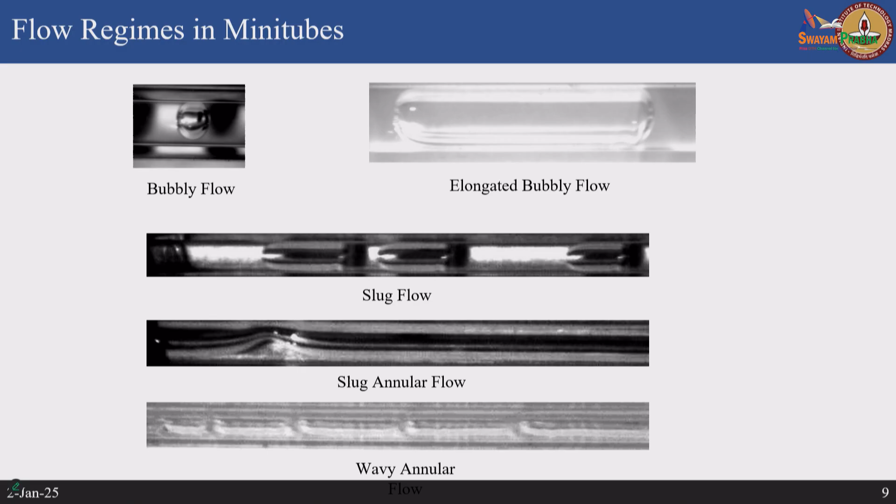Portion in flow boiling, basically the flow regimes in different size tubes, and then how we use correlations which are purely empirical, based on experiments, because there is absolutely no rigorous theory to calculate the heat transfer coefficient during flow boiling. Even in pool boiling we rely on empirical correlations.

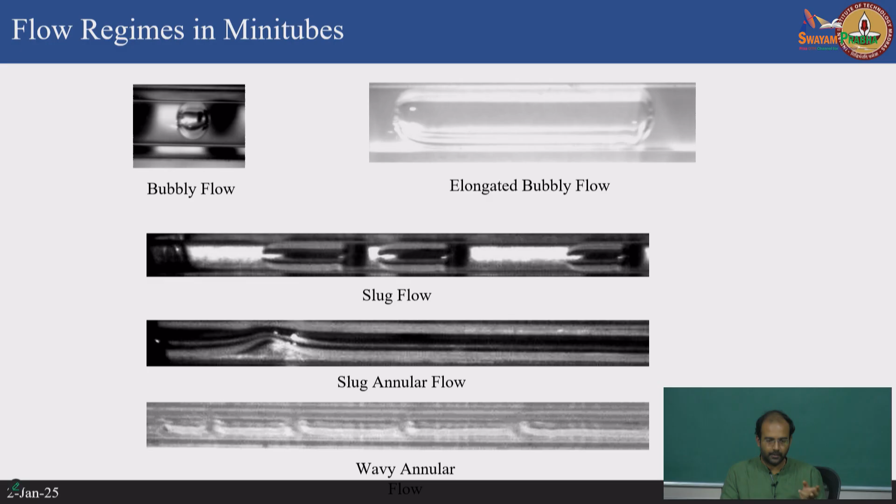So let's look at what I talked about when comparing the size of the tubes. As you reduce the size of the tubes, the flow regimes are quite different. In smaller tubes, the number of flow regimes is much lesser, so in that sense it is more predictable what flow regime you are operating in. At the same time, you may get the added benefit of improving heat transfer rates by doing flow boiling in these small size channels.

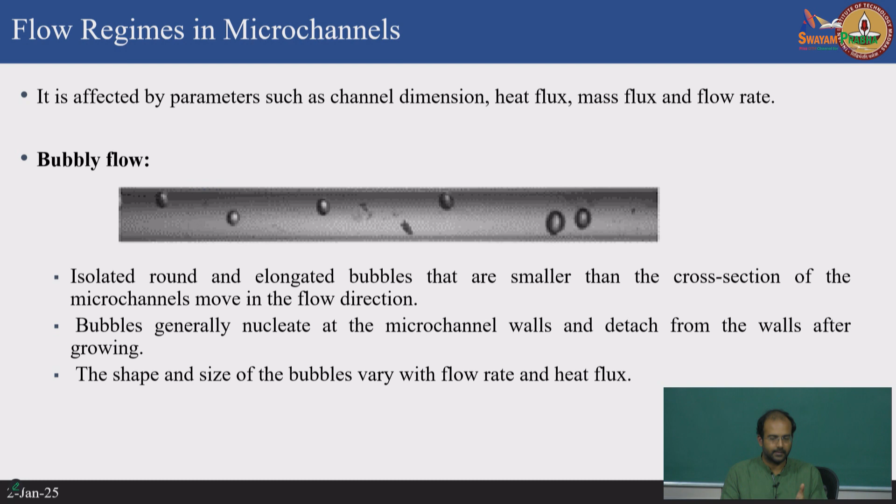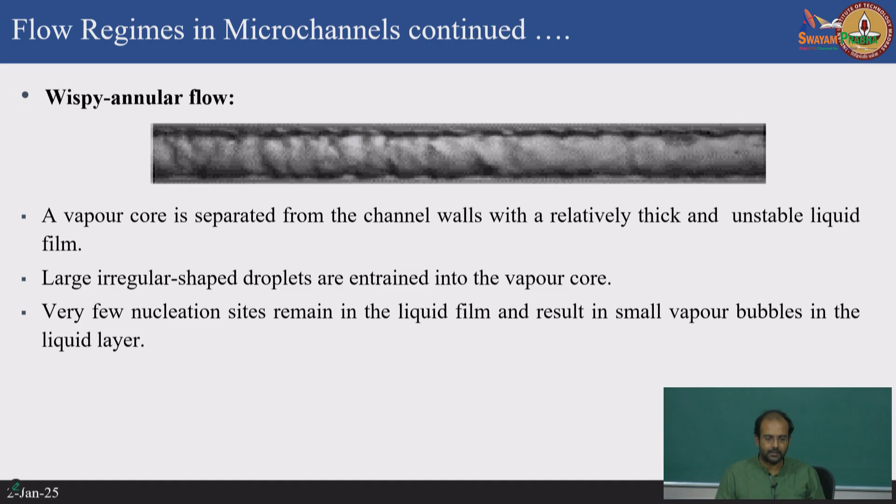As I said, bubbly flow is something described in detail in this presentation, I'll just quickly go over it. Then you have slug flow, and then annular flow. Within annular flow there are subtle differences depending on how the interface between the liquid, which is an annular film, and the core, which is the vapor, behaves. There is wispy annular flow, then pure annular flow.

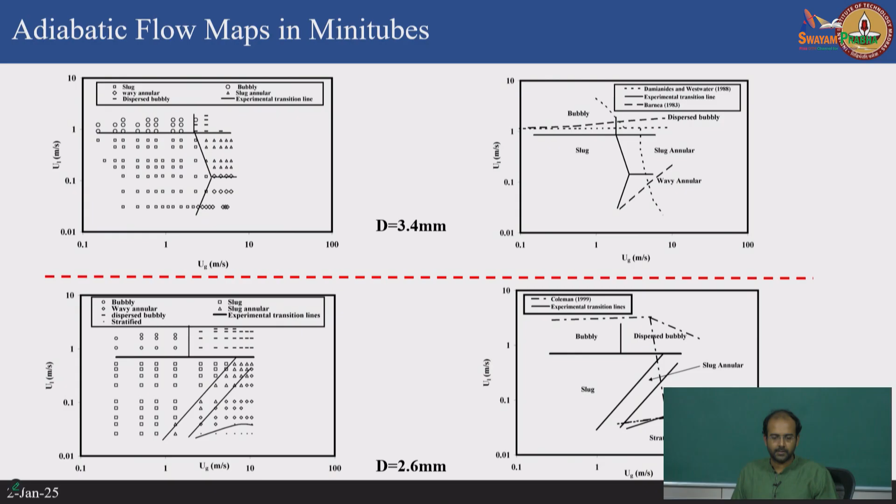And finally we come to these flow maps. These maps are very useful when people do experiments on different size channels. This particular map comes from the case where you have an adiabatic experiment mixing liquid and air in a T junction and looking at the different flow patterns.

How do you recognize this? Because you have specific control over the velocity of the liquid and velocity of the gas. Once you see this kind of flow map with velocity of the liquid on one axis and velocity of the gas on the other axis, you know it is an adiabatic flow map, because in a flow boiling experiment you cannot independently control the velocity of the liquid and the vapor. You can only do this with a controlled experiment where the mass flow rate of the air and the mass flow rate of the liquid are mixed separately.

Now what this map tells you is, if I keep the liquid velocity fixed at around 1 meter per second, and vary the vapor or air velocity from a small value of 0.1 meters per second to a large value of up to 100 meters per second, what happens to the flow regimes? If I increase the gas velocity relative to the fluid velocity, what is going to happen?

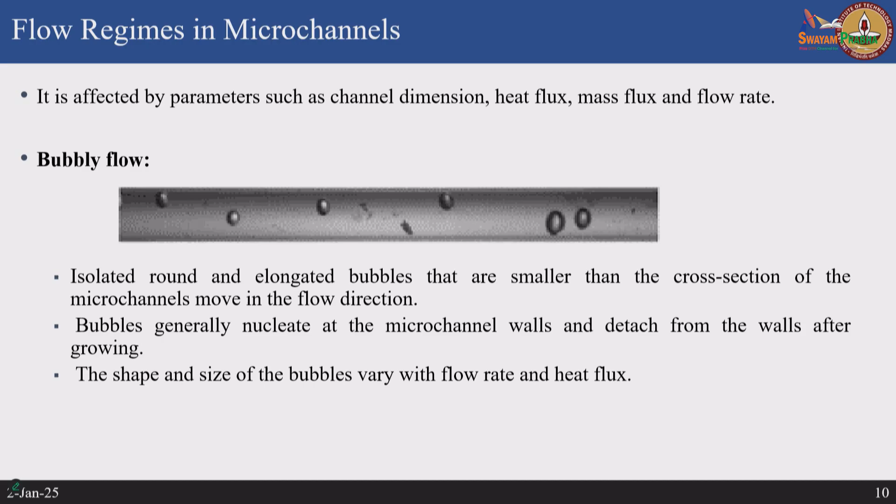The size of these bubbles should be growing larger, and so it mostly starts in the slug flow regime, because slug flow involves relatively large bubbles, and then they transition to a slug annular regime if I increase the air velocity much higher.

Now if I keep the air velocity fixed and increase the liquid velocity, I go into a bubbly regime because there are fewer air bubbles and more liquid core. So you can do these experiments at different tube diameters.

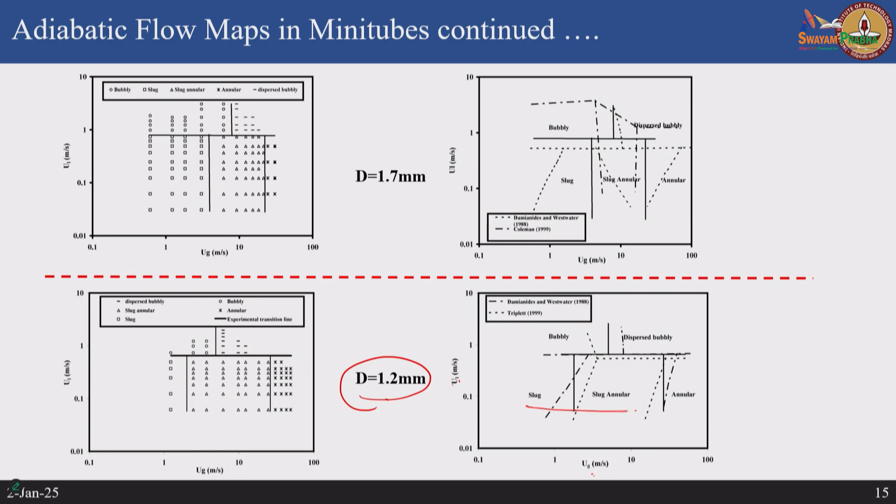If I go to smaller and smaller tubes, like 1 millimeter size tubes, what do I get? The number of flow regimes comes down, and increasingly, irrespective of the liquid velocity, if I change the gas velocity, it mostly stays in the slug annular regime, with very little bubbly regime.

And if I go to micro channels, it is even more controlled. Irrespective of the gas velocity, if I use moderate liquid velocities, it is mostly slug or slug annular patterns. So I have very tight control of the flow patterns if I go to very small size channels.

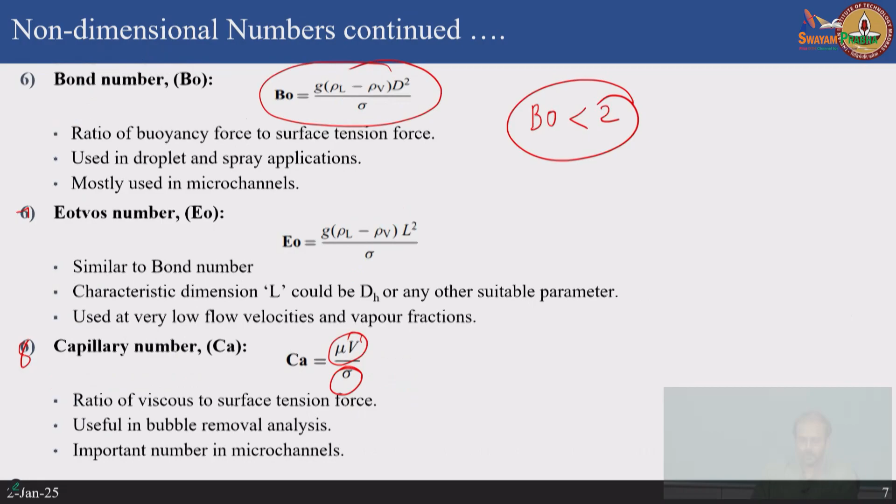So mostly they are in either slug pattern or slug annular, and the reason is, if you do this experiment, you will see that once you have a bubble, it quickly grows to the size of the tube diameter, and very quickly transitions into an annular slug flow or annular flow regime compared to a larger size tube.

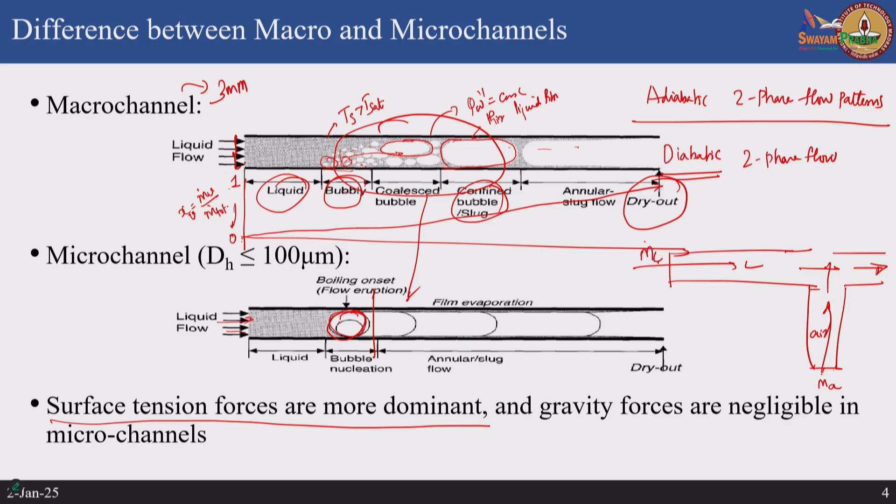So, therefore, the number of flow regimes are relatively less, and if you go to some very small size tubes, you are mostly left with only two options, either it is a slug or slug annular. But is this an efficient flow pattern? The answer is yes, because generally if you want a very high heat transfer rate, you want a slug or slug annular flow.

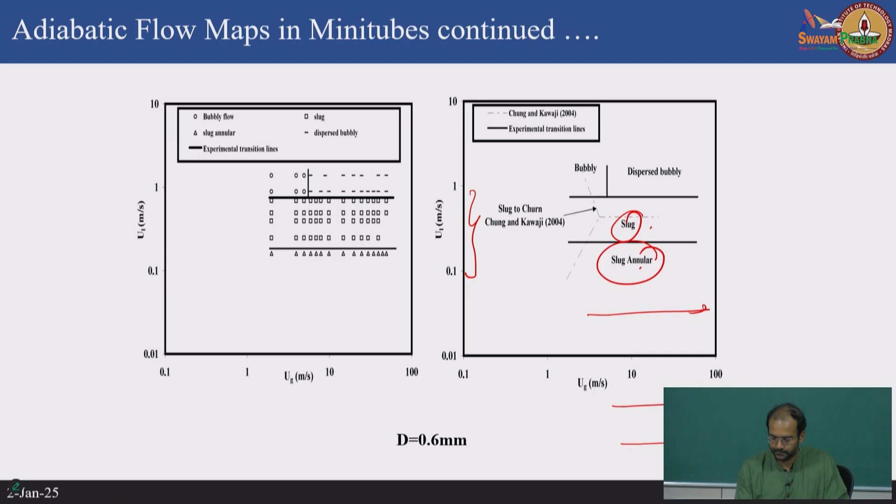The reason being, if you take this tube and you have a slug flow like this, so this is your bubble, vapor or air bubble, and this is your liquid film which is in the annular region. So, this is called the slug flow here. Now, if this grows to a point where the entire liquid core is vapor and only in the annular region I have liquid, this becomes a pure annular flow.

Now, why this is efficient is this thin film is actually very efficient in reaching very high rates of evaporation, because when I have a convective flow, this liquid film is not going to be eliminated very easily. Although the vapor bubble is large enough, the evaporation is happening by means of a very thin film in the liquid region, continuously fed by the velocity of the fluid. And the smaller the thickness of this film, the more rapid the evaporation rates will be.

So, it will be more useful for improving the heat transfer rate, and just because it is evaporating, it is not going to run out very fast, because there is a continuous supply of the liquid due to the advection that is bringing it in. So, the thin film will continue to exist, but due to very high and rapid evaporation rates, you will get very large heat transfer coefficients. Therefore, the slug flow or the annular flow regimes are actually sometimes very useful in terms of improving the convective and nucleate boiling.

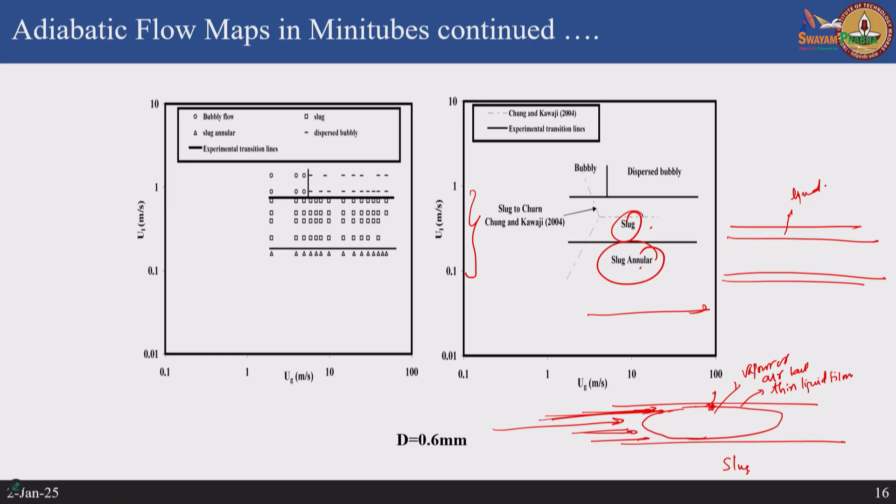Okay, so now there are two important mechanisms happening when you have flow boiling. One is dominated by what is called convective boiling, which is nothing but the movement of the fluid, so this is actually dependent on mass flux. Whereas the other effect is due to the boiling itself, which is the nucleation happening at the interface between the solid and the liquid. This is the nucleate boiling, and this is primarily dependent on the heat flux.

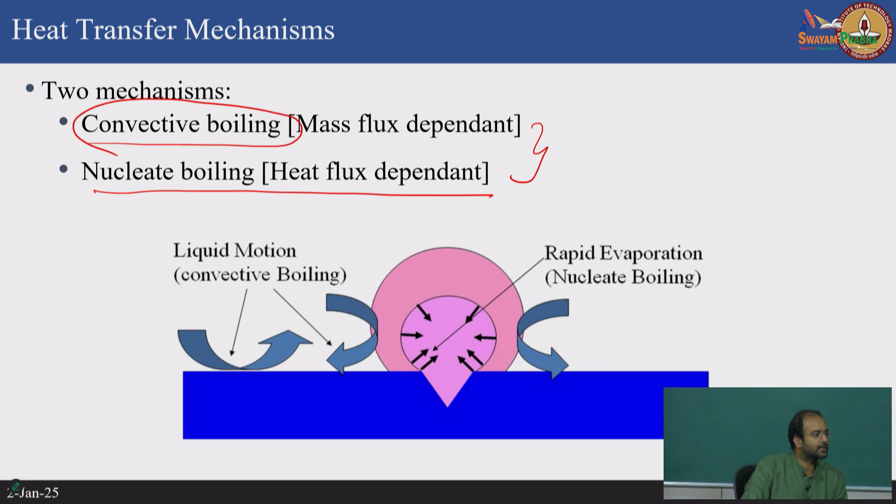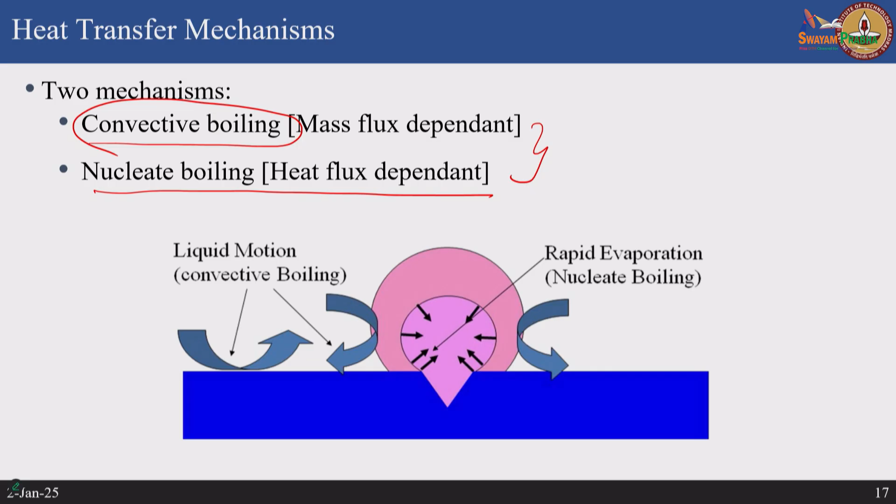So, therefore, the combination of these two mechanisms is going to augment your phase change heat transfer in a flow boiling situation. The convective boiling is important because it gives you a bulk motion, like what I was talking about, for example, the liquid film which is evaporating. This is going to continuously supply the liquid towards the liquid film if you have a convective component which is dependent on the mass flux, and at the same time, dependent on your heat flux is the rate at which nucleation can happen and nucleate boiling can be sustained.

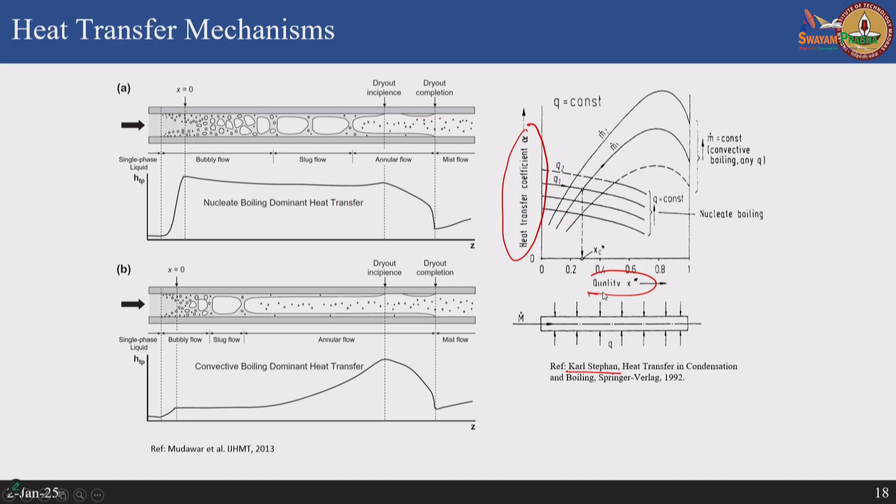Now, this is a very nice curve taken from Karl Stephan's book on phase change heat transfer. Here you have the heat transfer coefficient plotted as a function of the vapor quality. So, what it says is, if you have a nucleate boiling dominant regime, you will see that the heat transfer coefficient is very lightly dependent on the quality of the vapor, and whatever mass flux you are operating at, whether it changes substantially or not, the heat transfer coefficient is not changing much.

So, it is only controlled by the amount of heat flux that you supply, whereas if you look at the convective boiling dominant regime, it is only controlled by the mass flux that you put in, and not controlled by the heat flux. So, therefore, as I said before, if you have a nucleate boiling dominant regime, it is controlled only by the heat flux, whereas if you have a convective boiling dominant regime, it is controlled only by the mass flux.

When you are doing these experiments, you observe that the two phase heat transfer coefficient in a nucleate boiling regime looks more or less constant with respect to the vapor quality. It is slightly decreasing, but not much. Whereas in the case of convective boiling dominant regime, there is a substantial increase with respect to the quality. So when plotting with respect to quality, you see a substantial increase in the heat transfer coefficient.

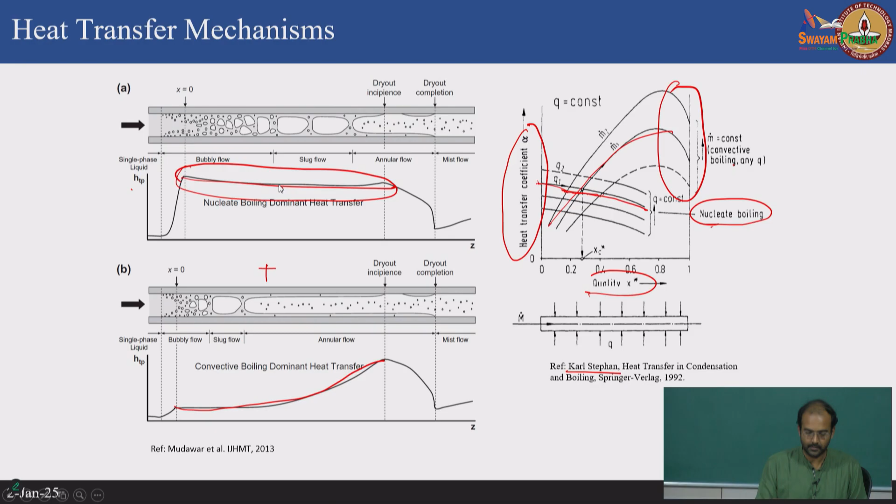Of course, the final heat transfer coefficient is the addition of these two. You have both nucleate boiling and convective boiling together, adding up and giving you the overall heat transfer coefficient.

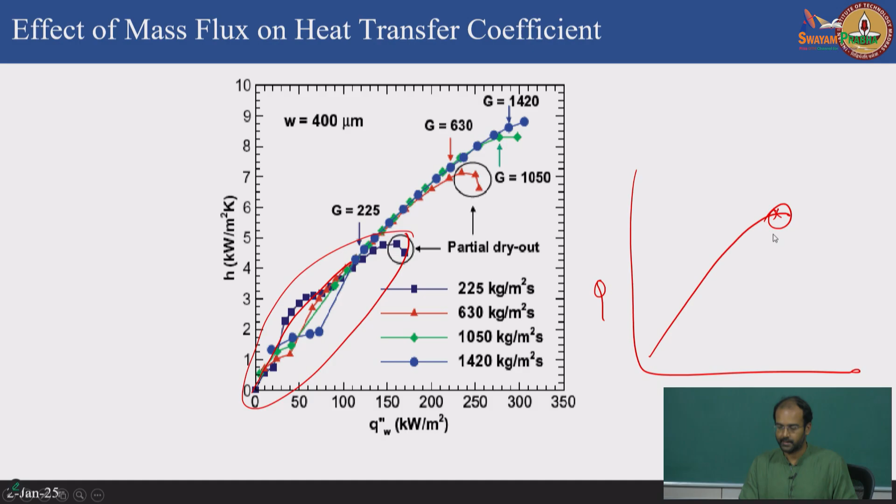So what happens to the pool boiling curve? You have the conventional pool boiling curve, let's say something like this, heat flux versus wall superheat. This may go like this, it may reach the critical heat flux. Now if I start increasing the mass flux in flow boiling, this curve will be shifted such that my critical heat flux will be shifted towards the top.

So when I increase the mass flow rate of liquid, I can actually increase the critical heat flux. That is beneficial because I do not achieve film boiling very quickly if I have higher mass flux.

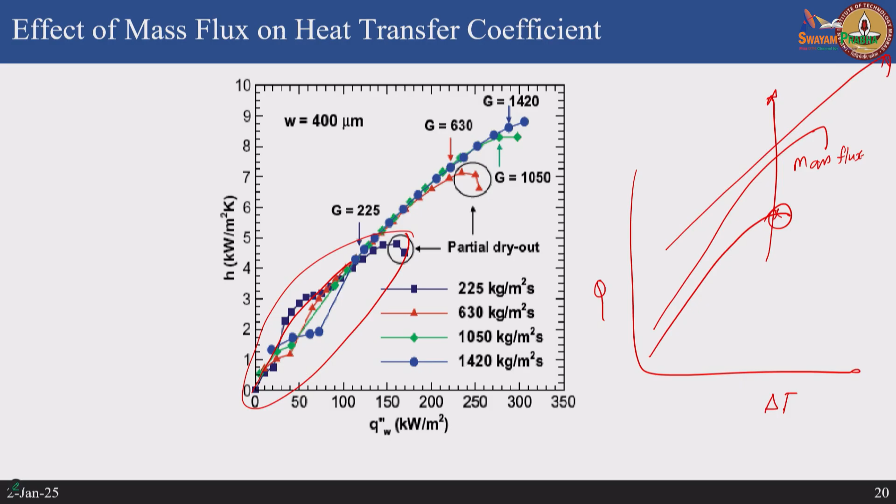So the important question is, how do I measure or calculate and predict the total pressure drop during flow boiling in small size channels? There has been a lot of research in the last decade or two, because people have been working on small size channels and want to predict the pressure drop and heat transfer coefficients.

If you look at the model, one of the most generally accepted models is that the overall pressure drop comes from different contributions. It is not as simple as just calculating the pressure at the inlet and outlet. When you are especially modeling this, you have to account for a lot of things.

One is the contraction losses at the entrance of the tube, because in a small size tube, you are entering from a very large aperture into a very small diameter, and there is a substantial loss due to contraction of the fluid. So you have a contraction loss which you have to account for at the entrance of the tube.

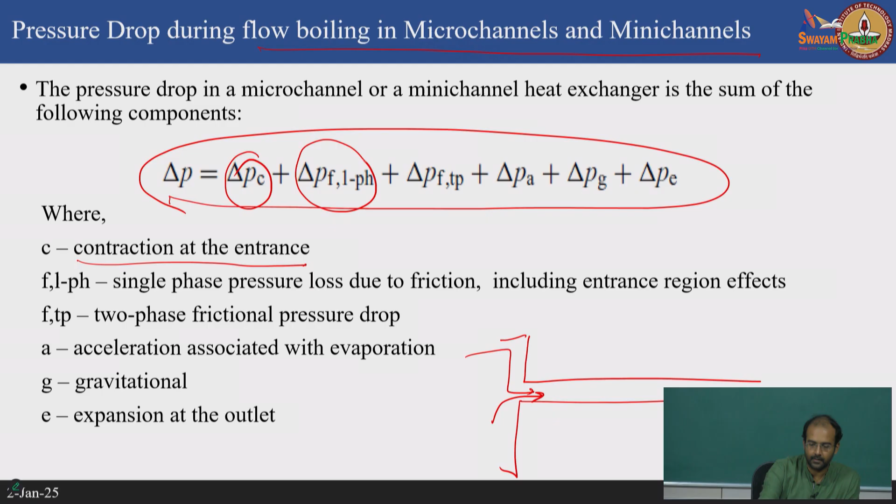Then there is a significant amount covered by only a single phase liquid, because once you start heating this channel, it is not going to immediately start boiling - it has to reach the saturation temperature of the fluid at some location, probably somewhere downstream. From the entrance till that location it is going to be primarily single phase. Therefore the single phase contribution also might be important, and then the two phase contribution starts.

Once the flow boiling happens, then there are two phases, so you have to calculate the pressure drop due to the two phase. Then there is something called acceleration pressure drop, because if you have large amounts of vapor, the vapor is going to move much faster than the liquid, and there is an acceleration component which will induce additional pressure drop.

Then there is a gravitational component. This depends on the size of the channel. If you have a very small micro channel with a very small bond number, then the gravitational pressure drop may be insignificant. And then finally you have the expansion - the flow has to come out again through a very large header, so this manifold will be very large, and again there will be a large expansion loss.

So the total pressure loss - when measuring pressure, usually we put a pressure tapping at the inlet header and the outlet header. When we measure this pressure loss in an experiment and want to compare it with the theoretical model, this pressure loss will include all these losses: the contraction loss at the inlet, expansion loss at the outlet, and within the tube you have a single phase pressure loss, a two phase pressure loss accounting for the flow boiling, and then gravitational and acceleration pressure losses.

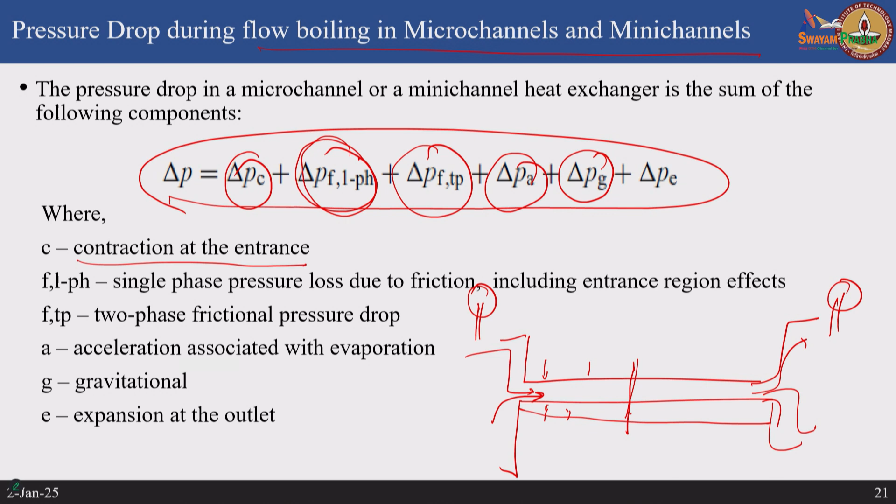For all this, I think it is very difficult to find exact theoretical models, but we have a number of empirical models.

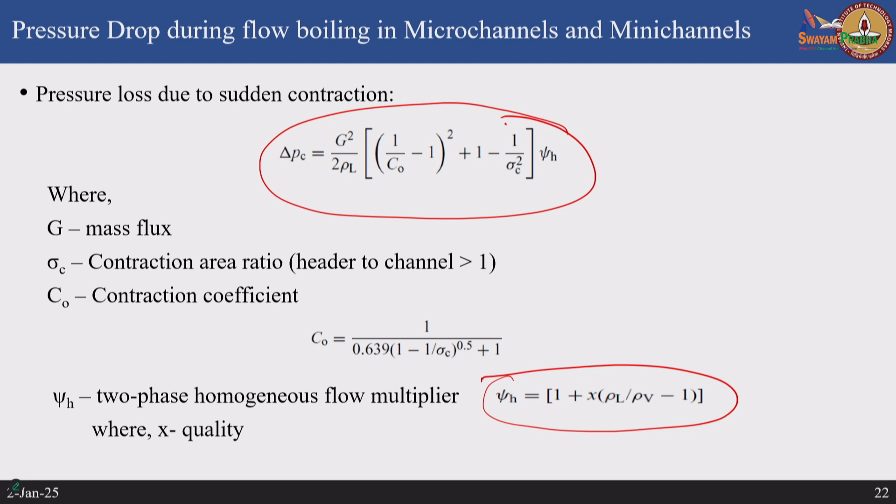So, I am just going to give those equations, for example, pressure loss due to contraction. We use an empirical model like this, where psi depends on the quality of vapor. If there is no vapor, if it is only liquid, x will be 0, psi will become 1, and this becomes the pressure loss used in single phase liquids.

Similarly, when you have single phase pressure drop, there is a region occupied only by liquid. In that case you use standard correlations developed for micro channels or mini channels, which are functions of the aspect ratio of the channel. Channels need not always be circular, they can have a rectangular cross section with different aspect ratios, denoted B and A. Depending on aspect ratio, Shah and London have given a correlation for the single phase friction factor for rectangular channels of different aspect ratios.

When talking about single phase pressure drop, there may be a developing length portion and a fully developed length portion. The boundary layers merge and then it becomes fully developed, so this developing length also has to be accounted for. People use the Hagenbach factor as a function of aspect ratio to account for the developing effect. The overall pressure drop is the developing length pressure drop plus the fully developed frictional pressure drop.

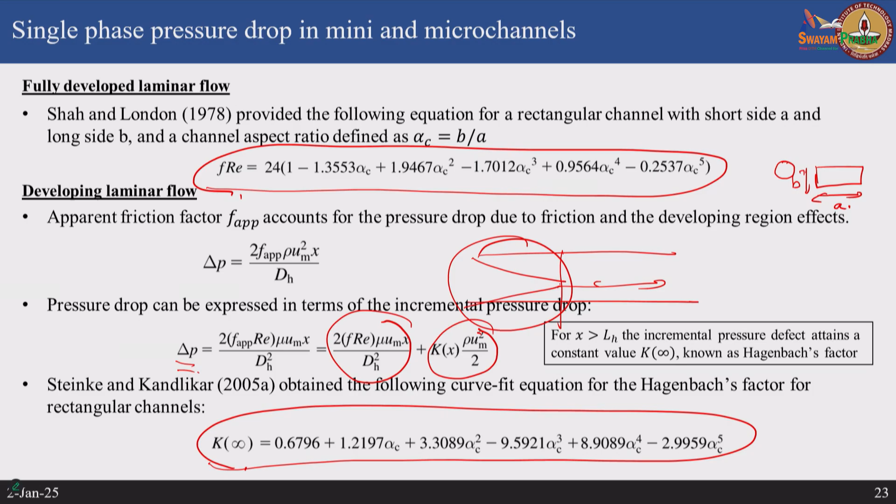The exit pressure loss is also given by an empirical model depending on the quality of vapor at the exit. Then the most important contribution is the two phase pressure drop, because once flow boiling happens, the contribution of vapor and liquid to overall pressure drop is given by the two phase pressure drop. This is calculated based on the pressure drop of liquid alone multiplied by what is called the two phase multiplier.

This two phase multiplier is a function of x, the Martinelli parameter. Recall the Martinelli parameter is the ratio of pressure drop when you have only liquid divided by pressure drop when you have only vapor, and that is used to calculate the two phase multiplier and finally the frictional pressure drop.

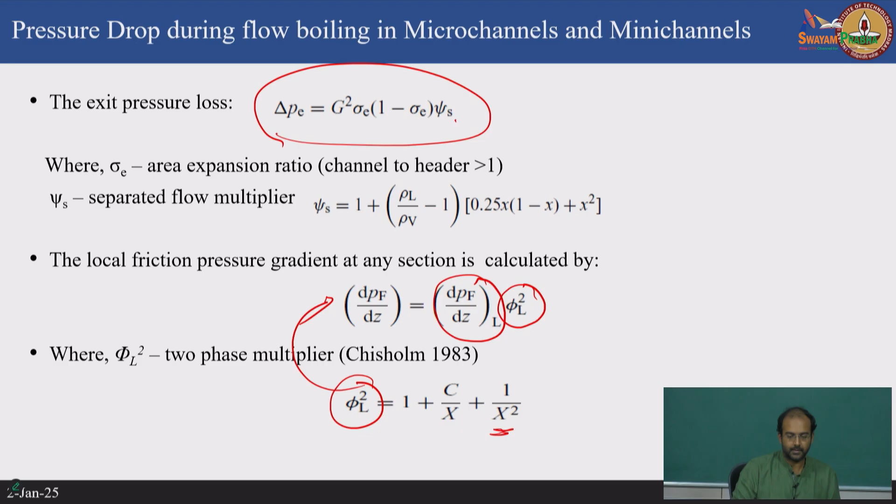I am giving all these equations so you can go through and use them in the calculation. In the Chisholm expression, C upon x plus 1 upon x square is coming. Here Martinelli is 1 upon x square, so you have to take the square root of that - x square is this, so x will be the square root of this.

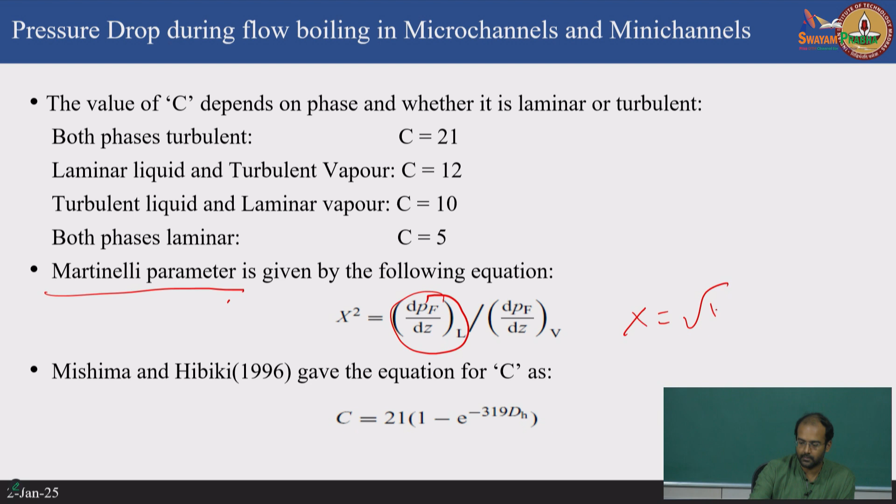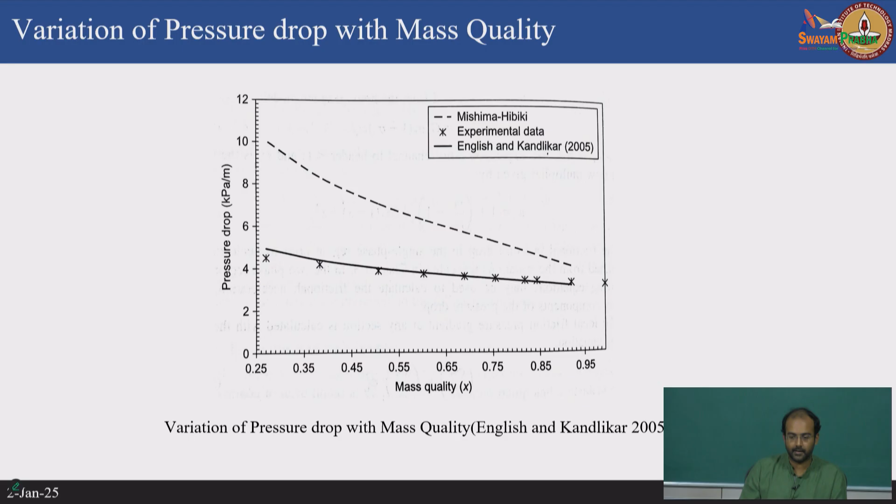Then you have expressions for gravitational pressure drop and acceleration pressure drop, so you just have to use them, and finally predict the pressure drop as a function of vapor quality.

Finally for heat transfer coefficient, there is a famous correlation given by Kandlikar. For Reynolds numbers above 100, he classified this as primarily the convective boiling dominant regime. He gave two correlations, one for nucleate boiling and one for convective boiling, and depending on Reynolds number, if it is very large, it is dominated by convective boiling, so only that correlation will be used.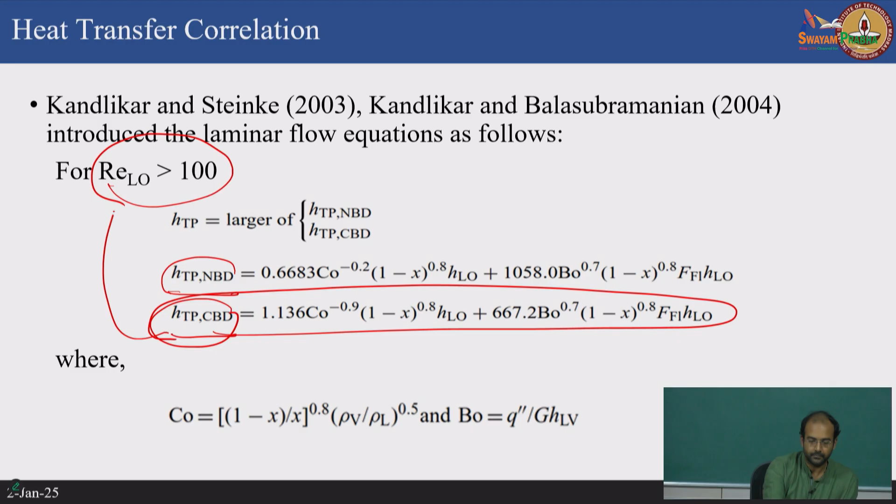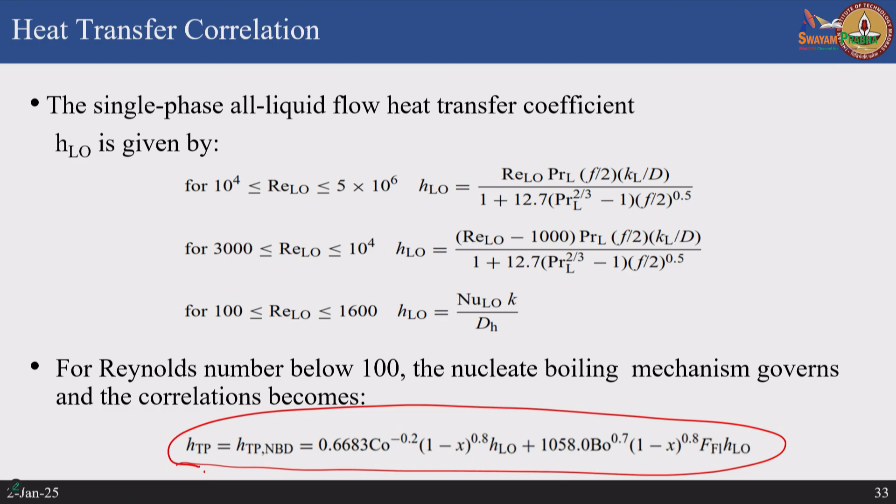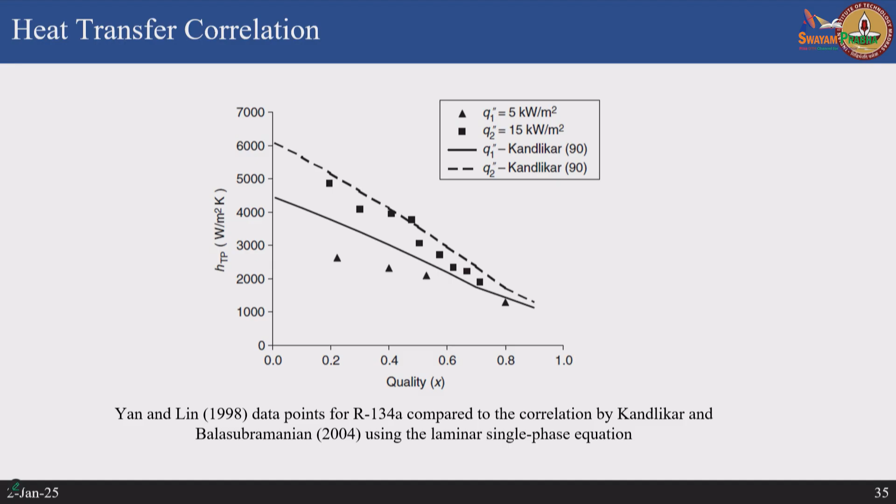If your Reynolds number is below 100, it is dominated only by nucleate boiling, so you use only the nucleate boiling correlation. There are some more parameters like this parameter f, which can be obtained for different working fluids. This is the final plot of that correlation. I think that completes flow boiling.

So what I will do, since we have some time, is quickly display a tutorial so you can see how to solve this problem. I have the solution also displayed here, so you can try to go through some of the steps. I am also uploading this tutorial along with the PPT later on, so you can watch it later.

The first problem is basically pool boiling. There is a polished copper surface and you have water at 1 atmosphere pressure which is boiling, and assuming that nucleate boiling happens at 6.5 Kelvin - this is the onset of nucleate boiling - find the corresponding nucleate boiling heat flux. So how do you calculate that?

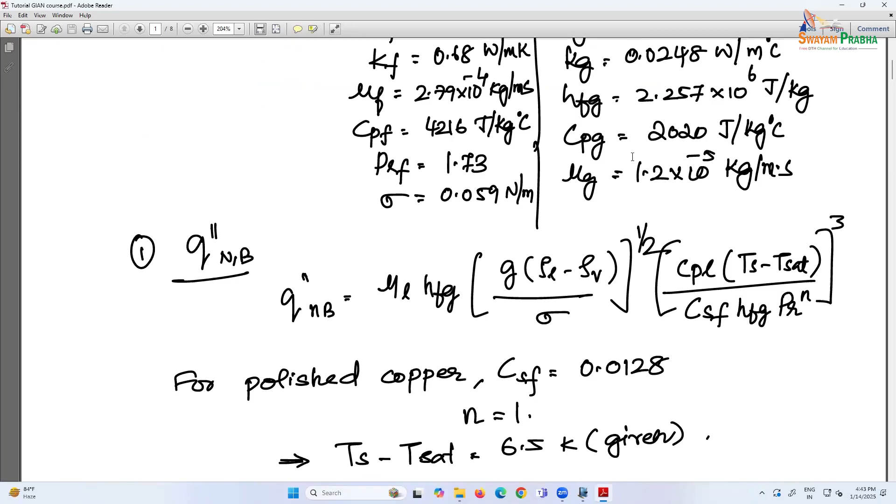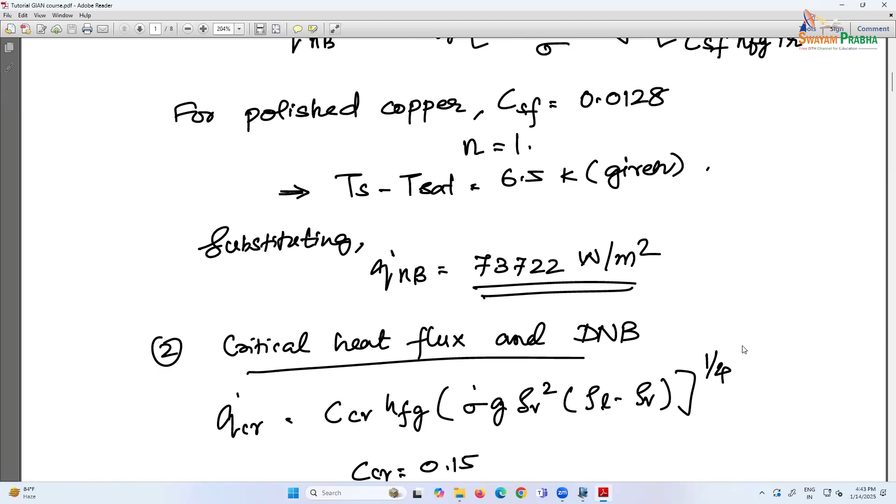So, this is using the Rohsenow correlation. After that, calculate the critical heat flux. You have the correlation also for critical heat flux, so you just have to substitute these thermophysical properties and calculate what is the critical heat flux.

You see here the onset of nucleate boiling happens at 73,000 watt per meter square, whereas the critical heat flux is at 1.2 million watt per meter square. So, this is much higher than what you see generally in the onset of nucleate boiling.

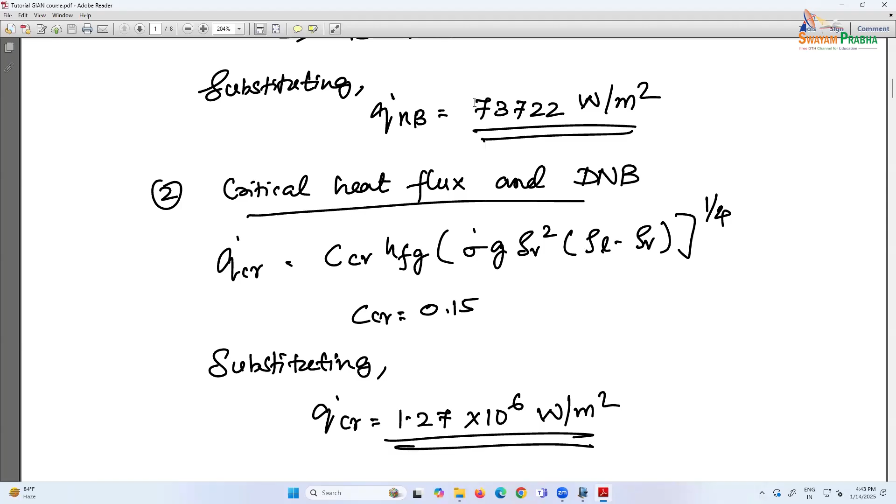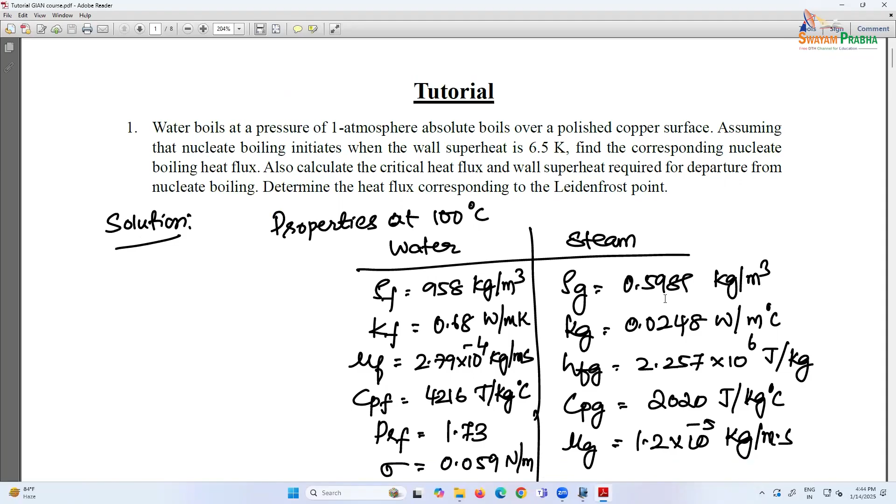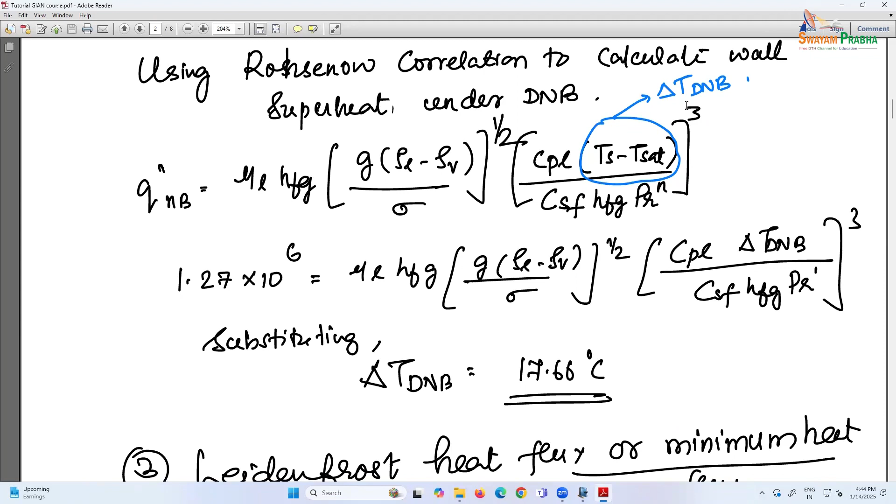And finally, what is the heat flux corresponding to the Leidenfrost point, that is the minimum heat flux. Again use the correlation for Leidenfrost heat flux, and that will give you the value, and there the value comes to be 19,000. So, it is much smaller than the onset of nucleate boiling.

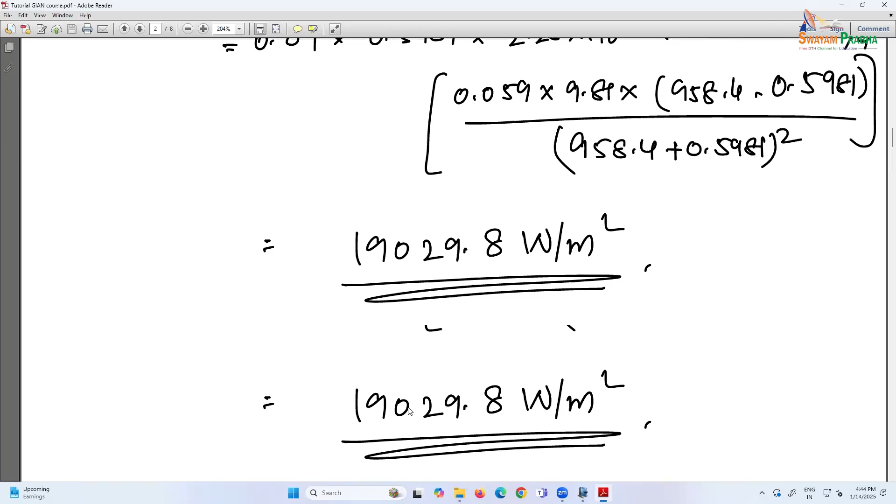So, this is one problem. These are just standard correlations, you are just substituting the numbers and finding out the heat flux values.

Now, the second problem is flow boiling. So, whatever we have discussed, all the correlations I have shown with respect to pressure drop and heat transfer coefficient, you can use that here. So, you have a rectangular microchannel heat sink.

The dimensions are almost 1 millimeter by 50 micron, so it is a very high aspect ratio rectangular microchannel, and then here we have heating on all 3 sides, but the top is not heated. So these 3 sides are heated, top is unheated.

The inlet temperature of the water is 70 degrees, the Reynolds number in the channel is 600. So, all the flow conditions are given. The quality of the steam corresponding to this heat flux is 0.055, which is at the exit of this microchannel.

So, the initial 10 mm length has single phase liquid, and the total length of the channel is 20 mm. So, everything is given: 10 mm of this microchannel is only single phase, then the remaining 10 mm has 2 phase flow, and your overall heat flux is this much. The exit vapor quality is 0.055, which is not very high, by the way.

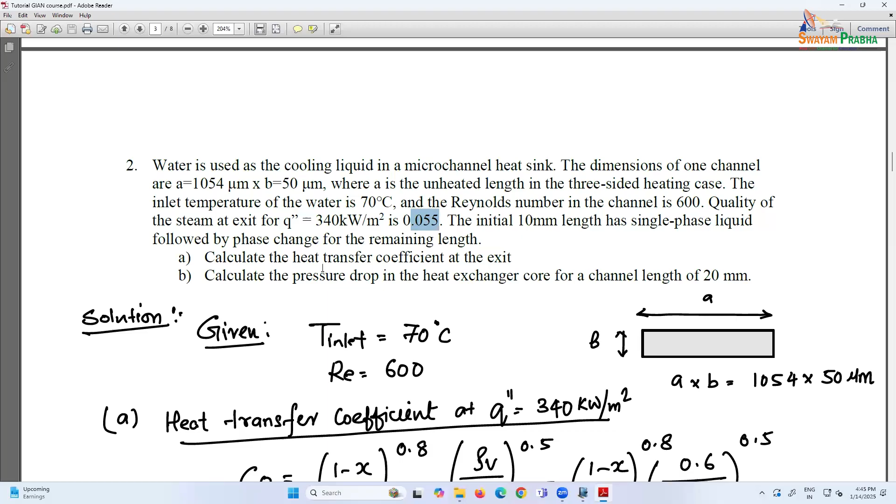So, you are asked to calculate what is the heat transfer coefficient at the exit corresponding to this vapor quality, and what is the pressure drop for the entire microchannel. So, how do we do that?

As I said, now you have to calculate the heat transfer coefficient due to convection boiling, due to nucleation boiling. These are coming from the Kandlikar correlation. So, each of this, for example, heat transfer coefficient due to nucleate boiling is a function of the convection number, the vapor quality x, and this parameter boiling number, and the parameter F1.

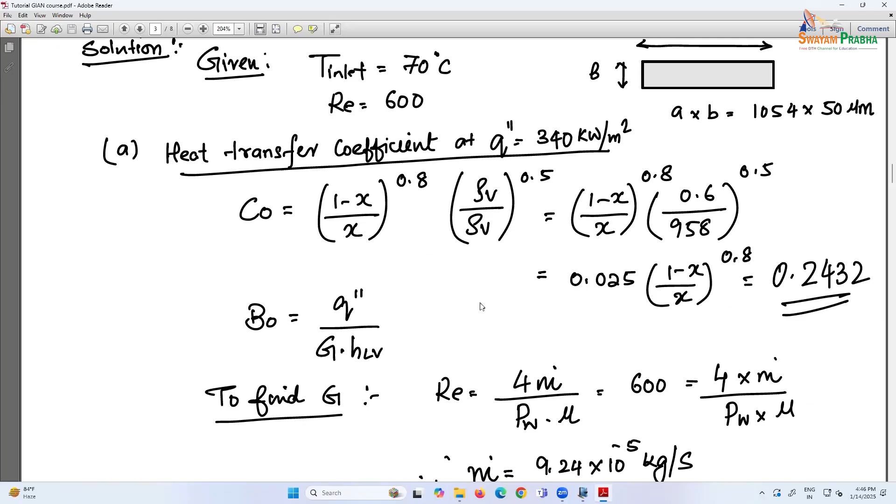So, for the given fluid you have to calculate what is the convection number and your boiling number, and for the given quality of vapor x, you know what is the value of heat transfer coefficient. So, the x value is given, that is 0.055, and convection number you have to calculate for the given vapor quality, boiling number also you have to calculate.

And once you substitute, the heat transfer coefficient for the 2 phase system is the larger of these two. Obviously, if you have Reynolds number which is above 100, automatically it is dominated by convection boiling, but in any case, to be on the safe side, you can estimate both nucleate boiling and convection boiling values and take the larger of that.

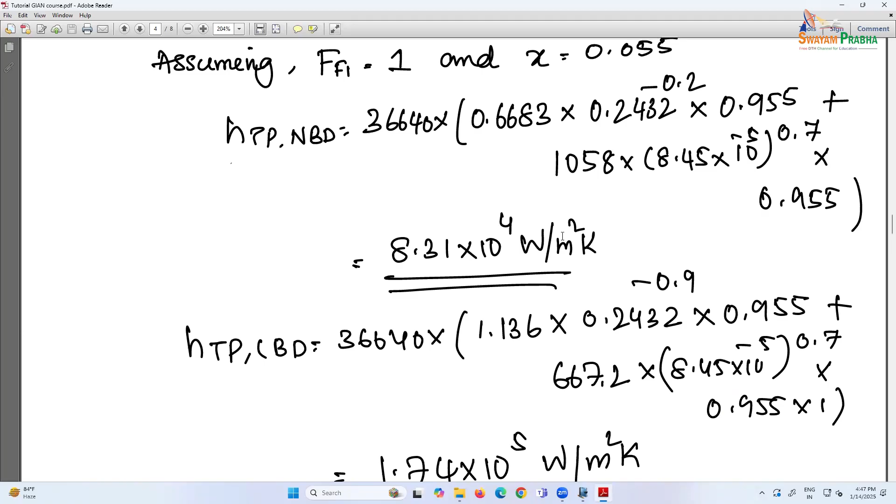So, if you do that, here you are getting for the nucleate boiling, H is 8.3 into 10 power 4 watt per meter square Kelvin. For the convection boiling, it is coming 1.7 into 10 power 5. So, the larger value is 1.74, and that will be the heat transfer coefficient for the flow boiling.

So, this is basically how it is usually estimated. You estimate both nucleate boiling and convective boiling, and take the larger value, because these correlations have both contributions anyway. It is not like...

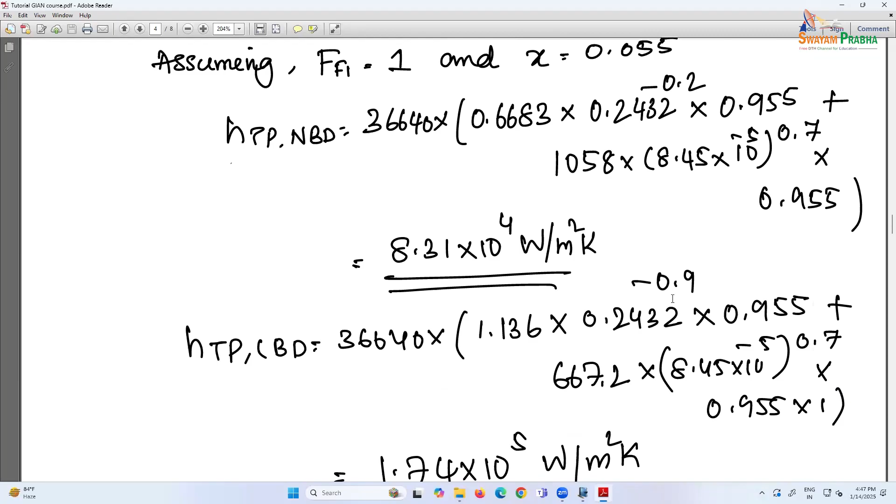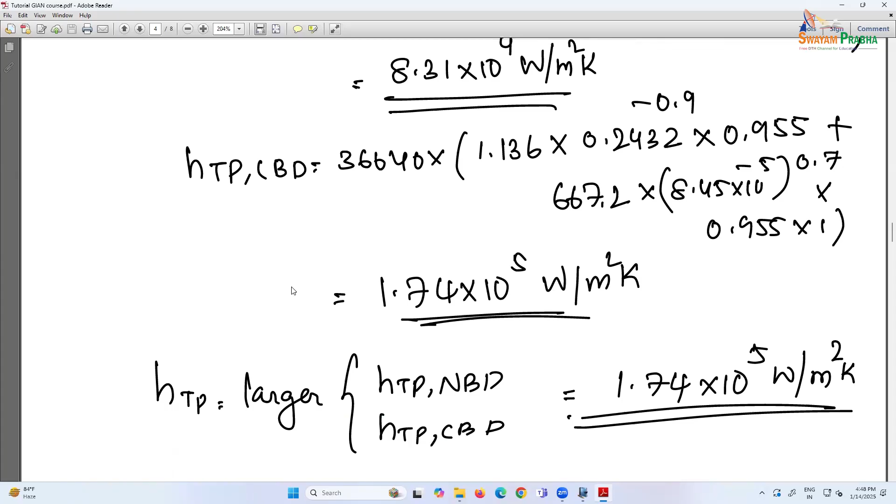Yeah, it's actually, that's why finally it comes out that way. We can straight away do that, but you can always calculate both and check whether this is making sense, because if Reynolds number is very large, automatically it should be governed by convective boiling. But generally, if you look at these correlations, they have functions of both convection number and boiling number in both nucleate boiling and convective boiling.

So, the effects of both nucleate boiling and convection are already incorporated in both these correlations. It is not like the nucleate boiling dominant correlation will have only effects of nucleate boiling, so you should not simply add them. The reason we take the maximum is each correlation already includes effects of both the convection regime and the boiling regime. This correlation applies only when nucleate boiling dominates, and the second correlation applies only when convection boiling dominates.

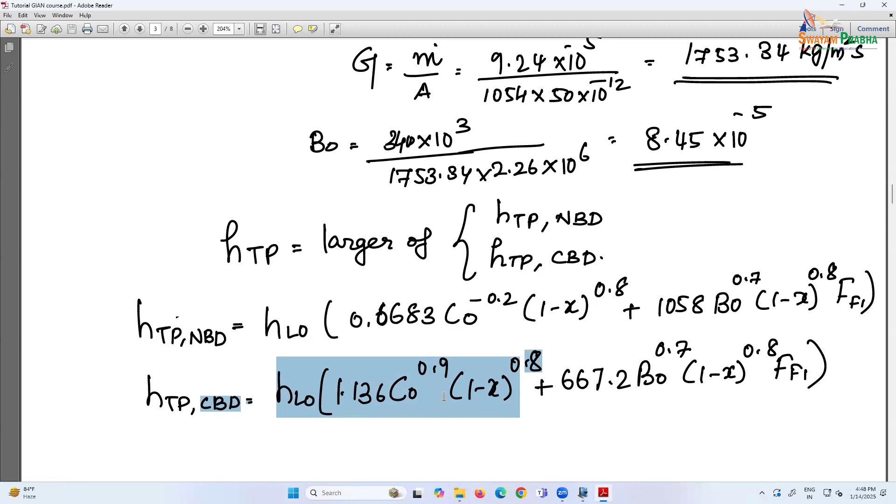So you have to find out which regime is dominant. If the Reynolds number is greater than 100, it is usually dominated by the convection boiling regime. So the larger value of these two should be a guideline.

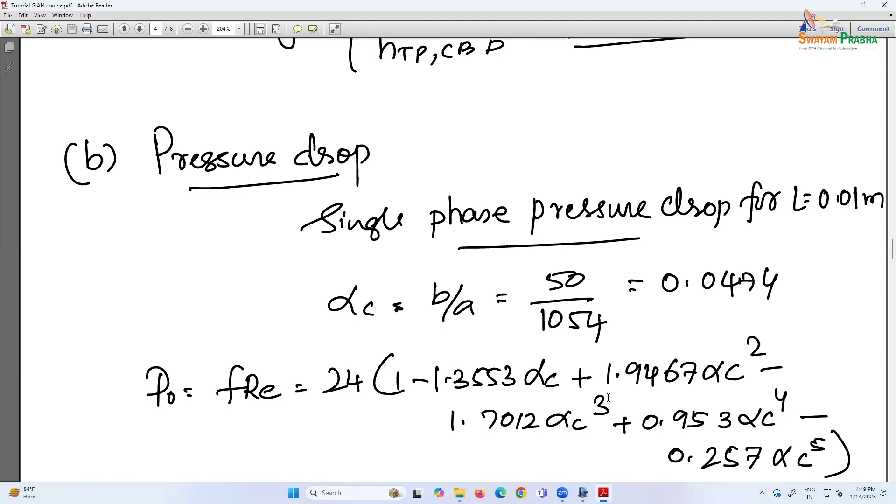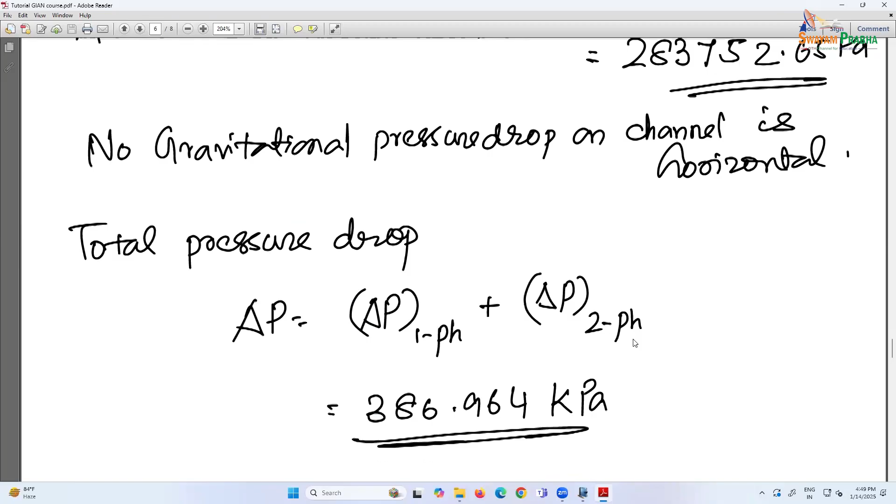The next part of the problem is pressure drop, and this is actually more complicated than heat transfer coefficient, because you have contributions from all the regions. Initially you have single phase liquid, so you calculate the developing region and the fully developed frictional delta P there. Then in the two phase region you calculate the two phase pressure drop. If there are any expansion or contraction losses, you account for that, and finally any acceleration pressure drop or gravitational contribution. So pressure drop is the most complicated parameter, even compared to heat transfer coefficient.

This data will help you know the pumping power and pressure drop. This is important because you are going to design your pump to handle these kinds of high pressure drops.

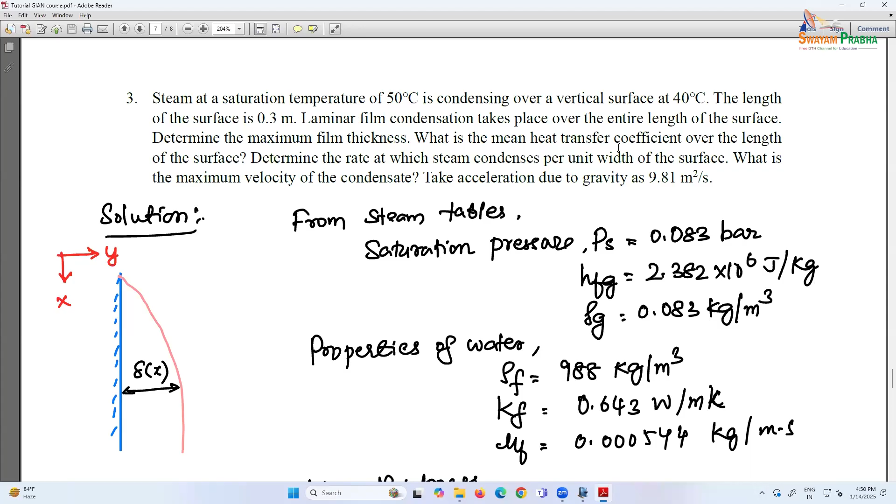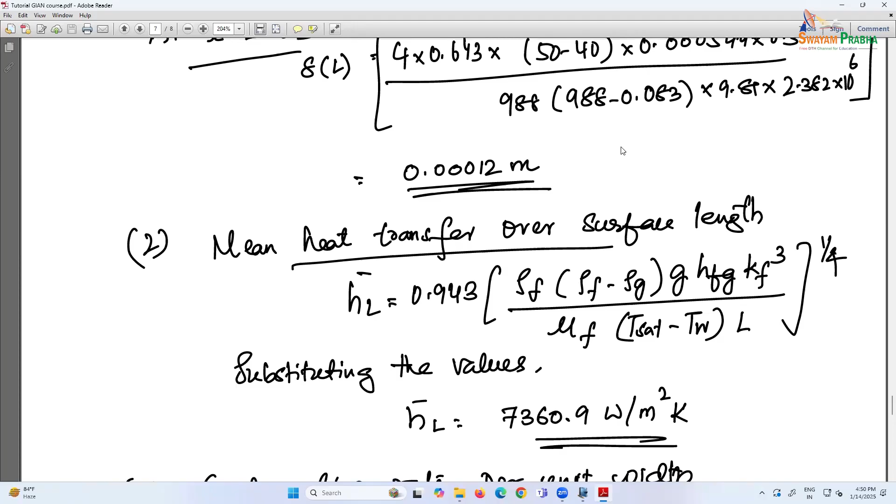So the third problem is on condensation, and I think this is very straightforward. You have film condensation, laminar film condensation, happening on a cold substrate, and the temperature of the substrate is given, along with the saturation temperature of steam. You are asked to calculate the mean heat transfer coefficient over the length of the surface. For that you use the Nusselt condensation theory and substitute all the thermophysical parameters, and after that you are asked to calculate the condensation rate.

So how do you calculate condensation rate? Whatever latent heat of vaporization is taken has to be taken out through the plate at steady state. Therefore your Q dot going through the plate has to equal m dot into h f g, the latent heat of condensation that has to be carried out by the plate. So you equate these two and calculate the mass flow rate of condensation.

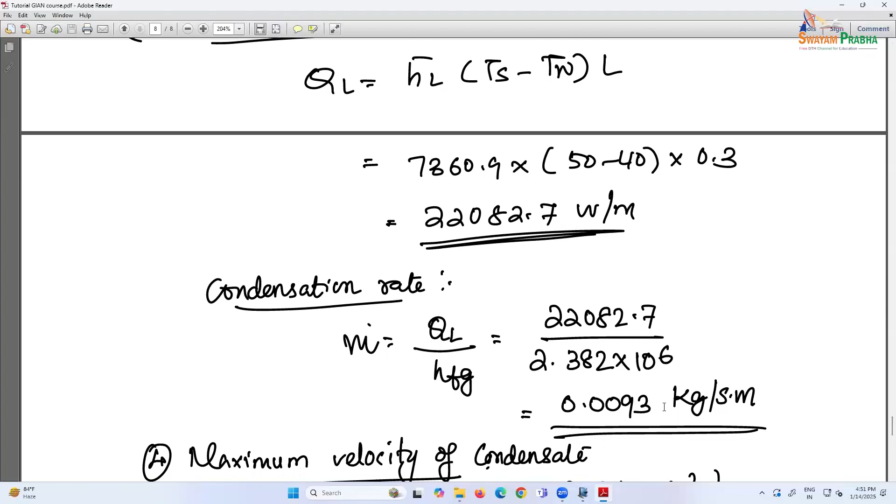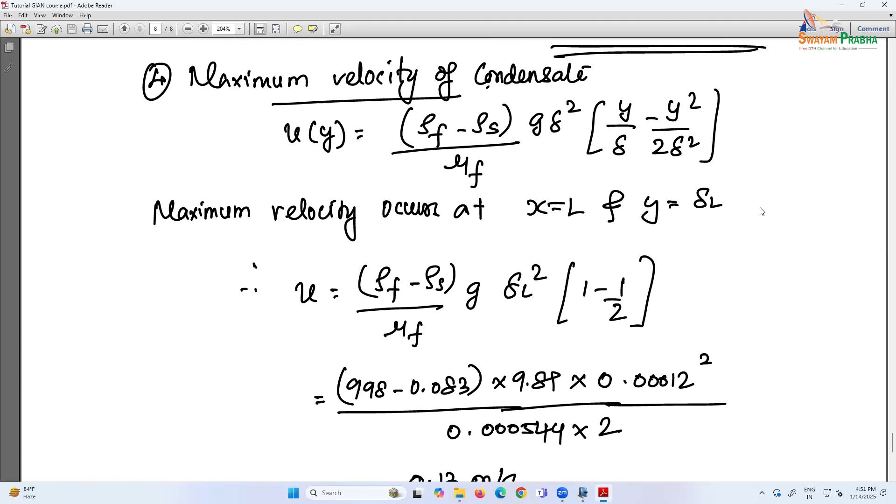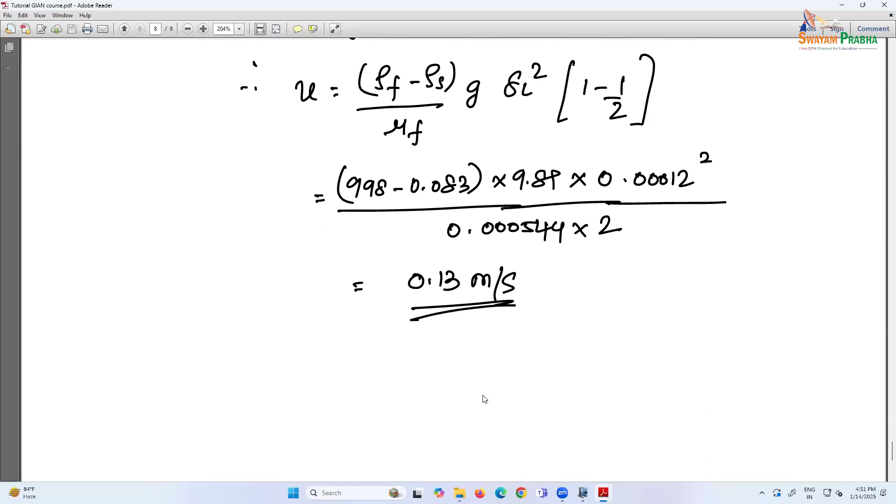And the final part is the maximum velocity of the condensate. You have the velocity profile from the Nusselt condensation theory, so you calculate the location of the maximum velocity. According to this, at y equal to delta will be the maximum velocity, and delta is also given by the Nusselt condensation theory. You substitute, get the value of delta, put it at y equal to delta, and you will get the velocity as 0.13 meters per second.

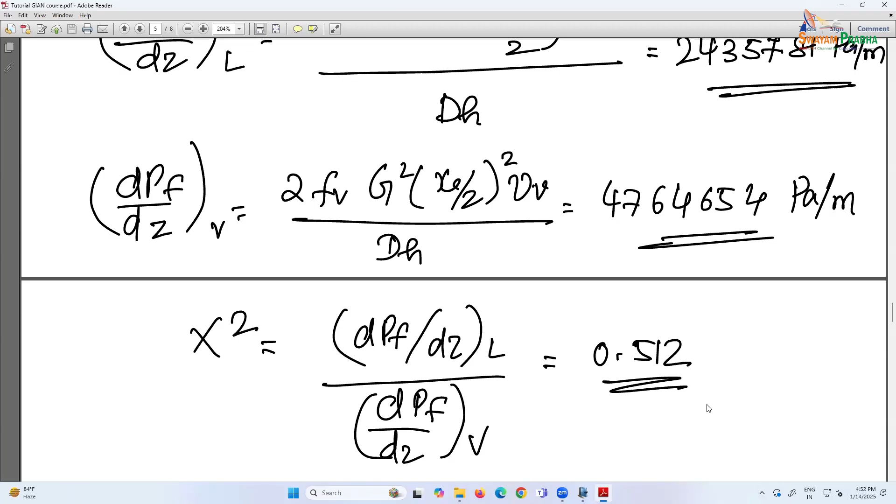This is just a basic tutorial showing how to use all these correlations in pool boiling, flow boiling, and condensation in a practical situation. As you can see, most of it is empirical. We do not have very rigorous theory derived specifically for each of these situations. Entire phase change heat transfer relies on the use of such empirical correlations, and most of it comes from experimental studies.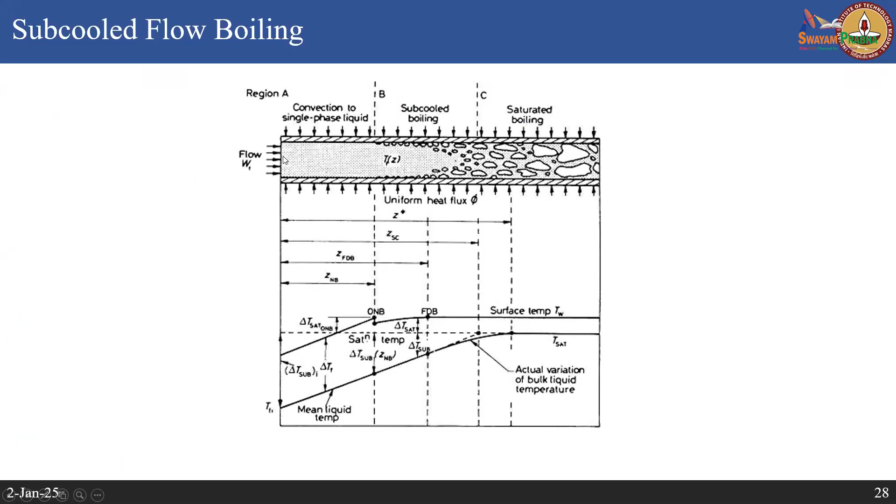It is basically plotting. As you have flow boiling, starting from single phase liquid, then boiling begins somewhere and you have the nucleation bubbly regime, and depending on the size of the channel, you may have a sufficient length for the bubbly regime before slug flow and annular flow develop. If it is a micro channel, it may go to annular flow very quickly. So if you measure the temperature of the wall as you maintain the heat flux along the length of the tube...

So, this is actually the plot. The higher temperature here shows what is the surface temperature of the wall along the length of the tube, and the temperature below the surface temperature is telling you what is the mean liquid temperature.

So, as you can observe, before the onset of nucleate boiling, when there is a single phase liquid, the slope of this line is like this for the surface temperature. Then the surface temperature shows a very small drop once the nucleate boiling happens. Locally there is an enhanced heat transfer, so the surface temperature shows a small drop.

Then from there it continues to increase slowly till the boiling happens in such a way that slowly the dry out is happening somewhere at the exit. Similarly, the response for the mean liquid temperature also shows continuous increase, because you are adding heat to the fluid continuously as you go along the tube length. So, the mean liquid temperature also continuously increases.

So, at some point the temperature difference between the wall and saturation reaches some horizontal value. There you see that slowly it is reaching a vapor quality which is kind of saturating, it is not changing further. So, depending on that, then these temperatures also stabilize.

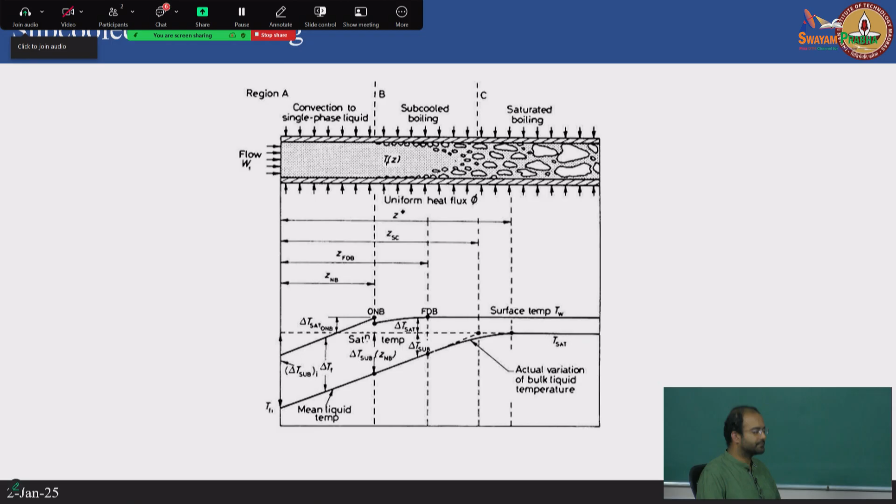One more thing, we have not talked about departure from nucleate boiling and dry out difference, or is there, in the case of flow boiling? Yeah, in the case of flow boiling.

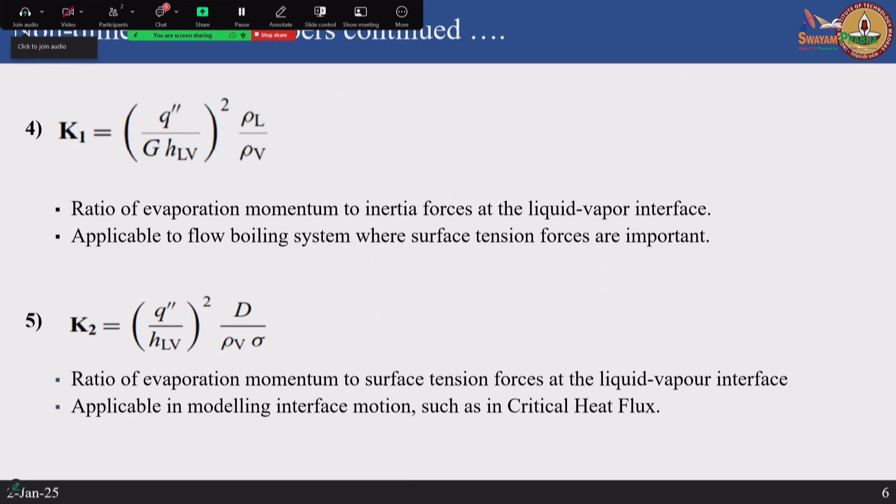Yeah, see, there is a dry out that can happen. These are of course adiabatic two phase flows, but when you are looking at this kind of flow boiling two phase diagrams, if you are continuously adding heat and you have very long tube lengths, inevitably you will have to reach the dry out.

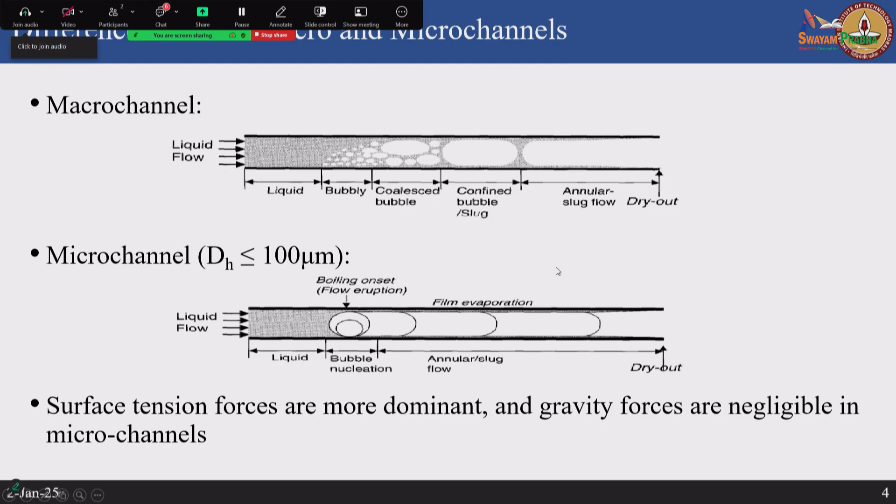Yeah, but there is a term also which I have read, but I have not understood, the departure from nucleate boiling, DNB. Yeah, so see, in flow boiling what we do is we plot the boiling curves, but also what is important is the vapor quality.

So, you know for sure, if you have, for example, in the problem that I was describing, your vapor quality is like 0.055 at the exit. So, definitely it is not anywhere close to dry out. So, by measuring the vapor quality you will be able to give a more quantitative understanding of whether it is close to dry out or not. If the vapor quality is very large, then you know that somewhere it is going to a dry out state.

So, in flow boiling it is a little bit difficult, because in pool boiling once you draw the pool boiling curve, you know that critical heat flux has been achieved, and after that it is going to go to film boiling. But in flow boiling you cannot do that, it is continuously moving and the vapor quality is varying. But if you measure the vapor quality somewhere at the exit, then you will be able to give a clearer picture whether it is close to dry out or not.

Yeah, so it is measurement of vapor quality which is more important. Maximum value is what, right? Yeah, maximum value will be 1, but most of the times it will be like 0.1, 0.2 like that.

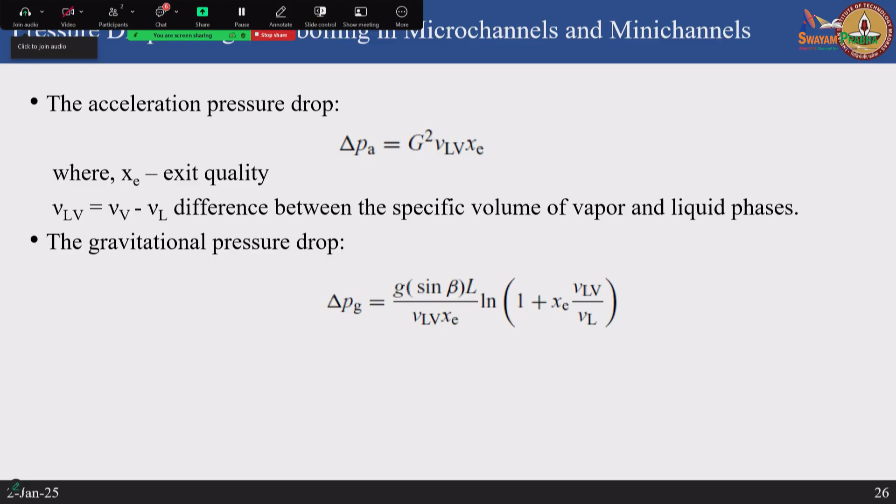So, by measuring vapor quality you will be able to quantify whether it is in the nucleate boiling regime or is it going to the flow boiling, film boiling for example. I think film boiling will not so easily happen in a flow boiling situation, because you are always continuously supplying fluid and there is the convection effect. So, there is always a Taylor slug flow that is going to promote a thin liquid film, but it will not completely evaporate to the extent that you see in pool boiling and cause a vapor blanket.

So, there will always be a continuous supply of liquid film. So, slug flow will be dominant for sure, as I showed, the flow patterns clearly show that in microchannels the two dominant flow patterns are slug flow and annular flow. So, that is going to be dominant, but you do not end up with film boiling so easily there. Yeah, okay, so I hope...